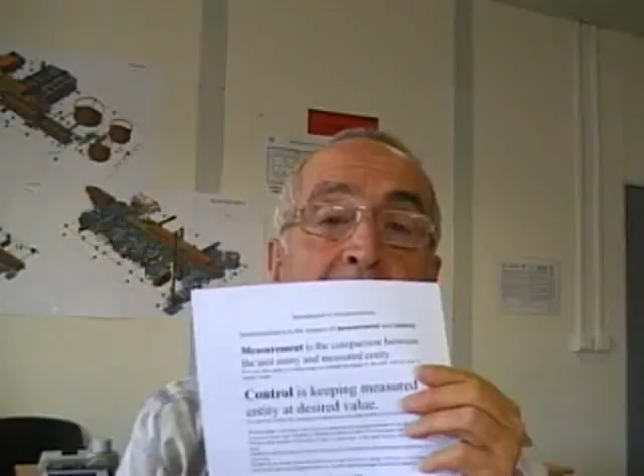Once again, measurement is the comparison between the unit entity and measured entity or quantity. And control is keeping measured entity or quantity at desired value or set point. In a plant, this means, for example, to keep the level of a tank at 60% of its maximum level.

Process plant is the plant where process materials, for example, mixture of oil and gas, are being treated to obtain semi-finished or finished products, crude to be transported through pipeline. Process plant operates following a recipe or technology in the same way as a recipe to prepare food. Further, to run the plant, civil works and electrical, mechanical and instrument equipments are necessary.

Further on, some forms of energy, electrical, energy from gas or oil, are necessary. And finally, the most important factor to run the plant are people involved in plant's operation. Instrumentation constitutes 10 to 20% of value of a plant. If we compare a plant with human body, instrumentation is the brain, the eyes, the nose, the ears, the hands and the legs. So it can be seen how instrumentation is a vital part of a plant.

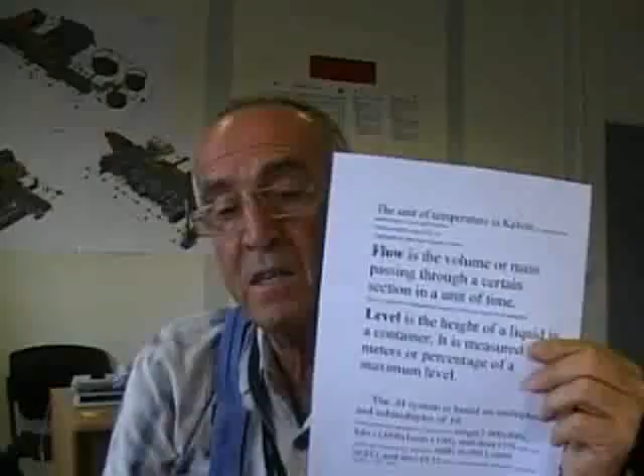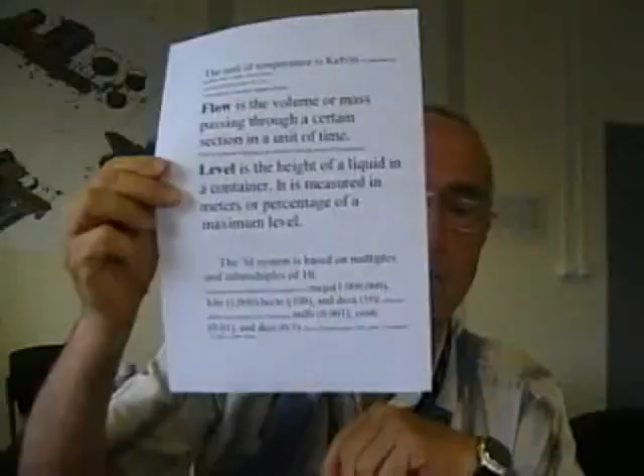Flow is the volume or mass passing through a certain section in a unit of time. Flow is expressed in kilograms per second or liters per second or its multipliers. Level is the height of a liquid in a container. It is measured in meters or percentage of a maximum level.

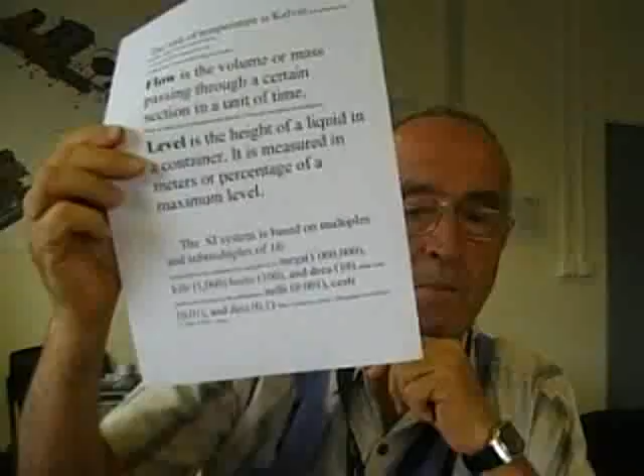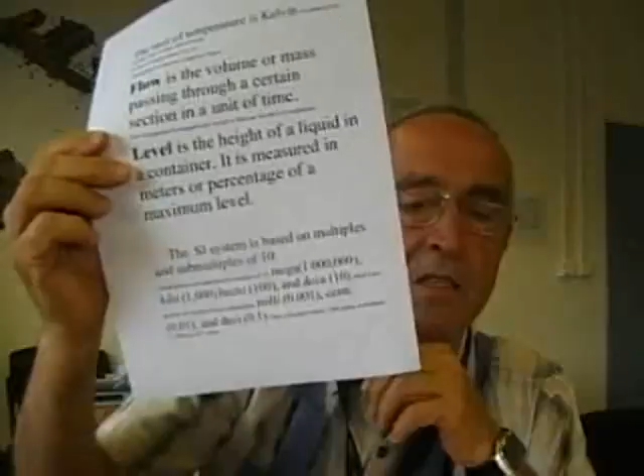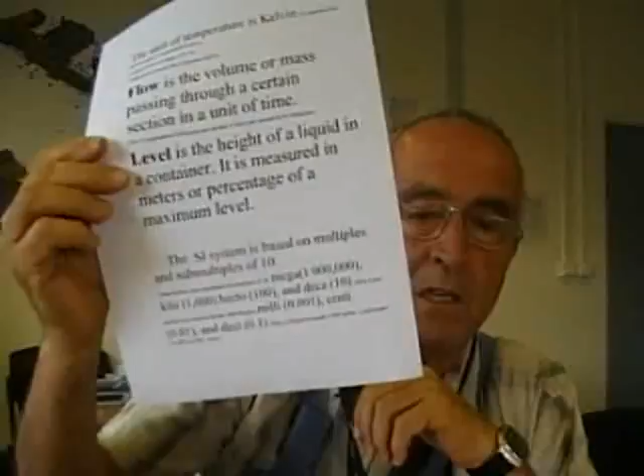The SI system is based on multiples and submultiples of 10. Greek prefixes are established for multiples of 10. Mega means 1,000,000, kilo means 1,000, hecto means 100, deca means 10, while Latin prefixes are selected for submultiples. Milli means 0.001, centi means 0.01, and deci means 0.1.

Measurement error. It is impossible to achieve total accuracy of measurement of any entity or quantity. A measurement error is always present. There are three definitions of errors and a definition of class related to measurement error. Absolute error is the difference between the measured value and true value. Relative error is absolute error divided by measured value. Percentage error is relative error multiplied by 100 and expressed in percentage.

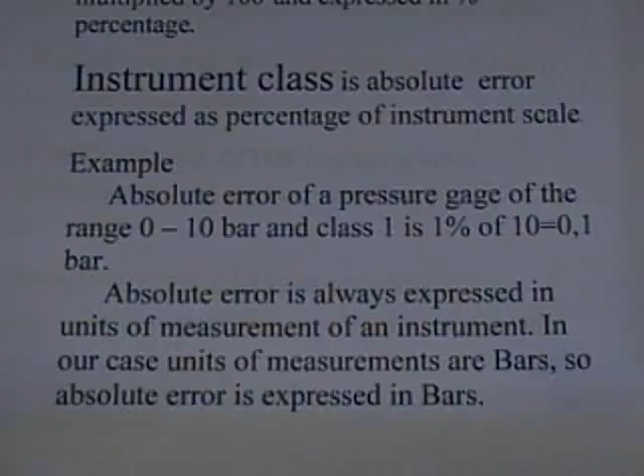Instrument class is absolute error expressed as percentage of instrument scale. Example: absolute error of a pressure gauge of the range 0 to 10 bar and class 1 is 1% of 10, which is 0.1 bar. Absolute error is always expressed in units of measurement of an instrument. In our case, units of measurement are bar, so absolute error is expressed in bar. Class 1 means that absolute error of the pressure gauge in the example is 0.1 bar.

If a pressure gauge has the scale of 0 to 16 bar and its class is again 1, its absolute error is 1% of 16, it means 0.16 bar. If its class is 2.5, its absolute error is 2.5% of 16. 2.5% of 16 is 0.025 multiplied by 16, which is 0.4. Class 2.5 of a pressure gauge with the scale of 16 bar means that the pressure gauge has an absolute

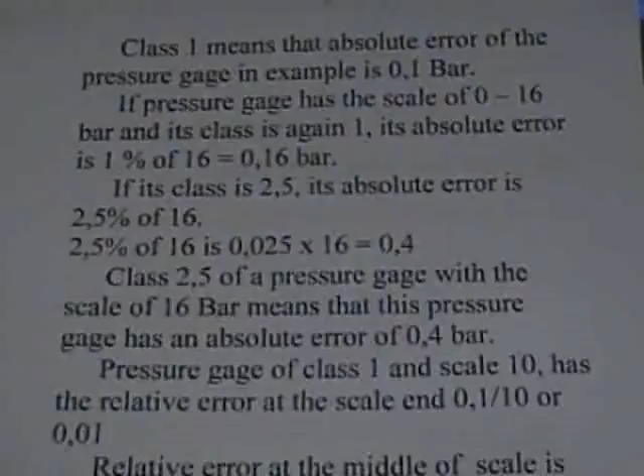error of 0.4 bar. A pressure gauge of class 1 and scale 10 has the relative error at the scale end of 0.1 divided by 10, or 0.01. Relative error at the middle of scale is 0.1 divided by 5 equals 0.02. 0.02 is twice as big as 0.01. At the middle of scale, relative error is double that at the top end of the scale. It is very important to understand that every instrument has the greatest accuracy at the top end of its scale.

Instrumentation basics. It has been said in the introduction paragraph that instrumentation is the science of measurement and control. And it has been explained what is measurement, what is control, and what is process plant. Let us go a little bit further, explaining in more detail what is control. Let us examine flow control.

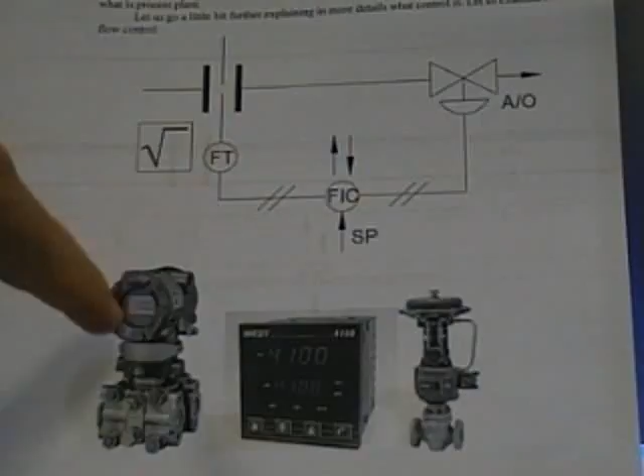On the picture we see 4 elements: orifice plate, flow transmitter, controller, and control valve. We see that flow can be controlled with 3 elements: flow element, orifice, and flow transmitter, flow controller, and control valve. Orifice causes pressure drop proportional to flow. Pressure drop is detected by pressure drop transmitter, which converts it to a standard communication signal and sends it to the controller.

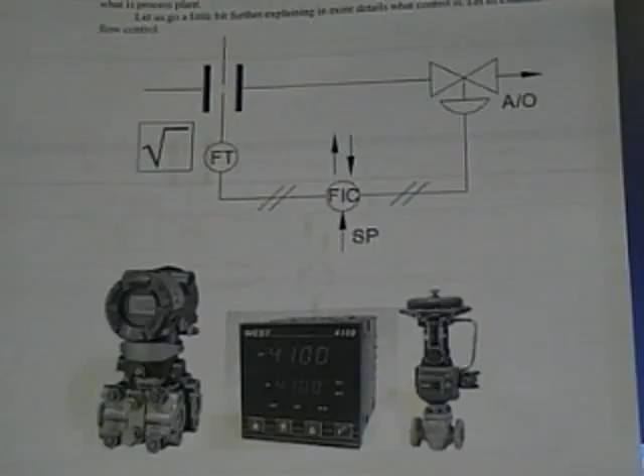Controller has 1 input, 1 output, and a set point. If the input measured value of flow is different from the set point desired value of flow, an output signal is created to change control valve opening in order to raise or decrease the flow to make it equal to the desired value or set point. These 3 elements, transmitter, controller, and control valve, constitute a control loop.

There is another element of instrumentation. It is called information. In fact, it is necessary to know the amount of flow, the so-called settings of controller, and the opening of control valve. Today, information is represented on a screen of a monitor. Now we can say that instrumentation is constituted of 4 items: transmitter of process quantity, controller of process quantity, control valve, and information entity.

Less than 100 years ago, processes have been controlled manually. Then, 70 years ago, appeared first controllers. 60 years ago, appeared the first control room and pneumatic instrumentation. Pneumatic instrumentation uses compressed air as the energy for its operation. Every transmitter had its indicator and every control loop had its single controller.

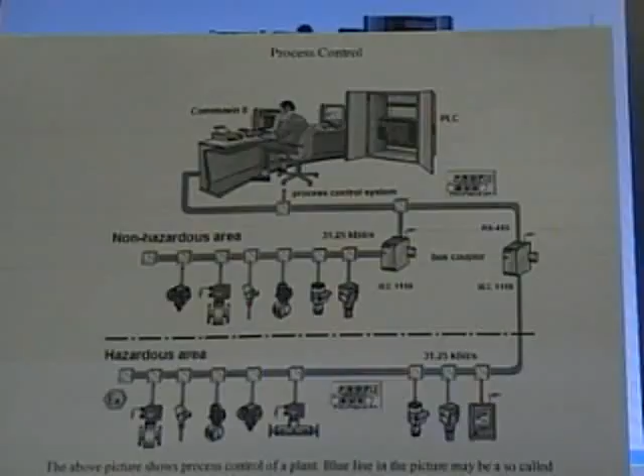The above picture shows process control of a plant. Blue line in the picture may be a so-called field bus, that is, many incoming and outgoing cables to and from DCS, distributed control system. DCS is a controller with its inputs and outputs from the field and monitors on which process data are shown.

Emergency shutdown system. A plant has a separate emergency shutdown system. It is nothing else but another DCS control system, whose function is to control the stopping of the plant in case of an emergency situation. It has similar elements as DCS system, that is, field instruments which are mostly fire, smoke, or flammable and toxic gas detectors, but also process instruments which, in case of plant abnormal operation, initiate plant shutdown, and as the output, control valves, which are now called shutdown valves, and switches to activate various shutdown equipment and sirens. ESD system has no proper monitors, but uses generally DCS monitors to show ESD information.

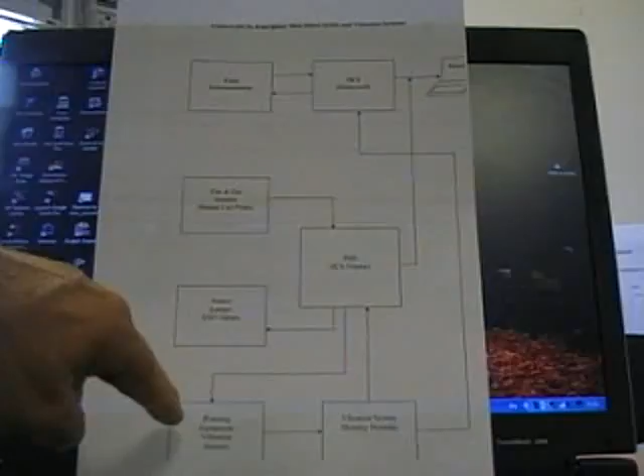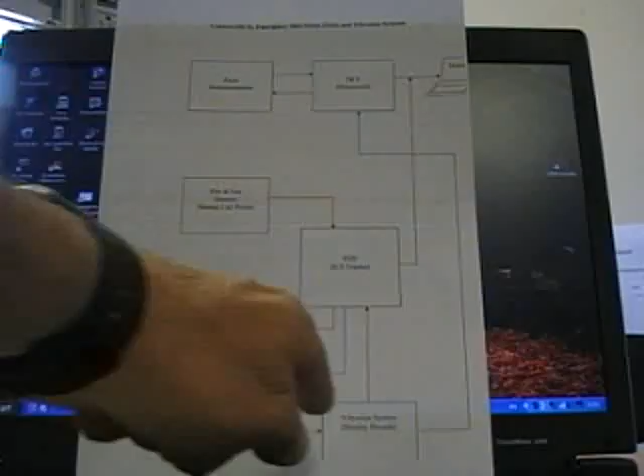On this picture, we see the schematic representation of all three systems. Field instrumentation is connected to DCS. All data are represented on monitors. Fire and gas sensors and manual call points are the inputs to emergency shutdown system. Also, rotating equipment vibration sensors are connected as the input to ESD system. Output of ESD system are sirens, lamps, and ESD valves. Input to the ESD system comes from vibration system.

Documentation, process diagrams. Many documents are issued during the development of a plant project. The main ones are block diagrams, process flow diagrams, and the most important, piping and instrument diagrams, PID, location plan, data sheets, loop diagrams, manuals. A block flow diagram is a schematic illustration of the major process elements. The blocks or rectangles represent a unit operation. The blocks are connected by straight lines, which represent the process flow streams, which flow between the units.

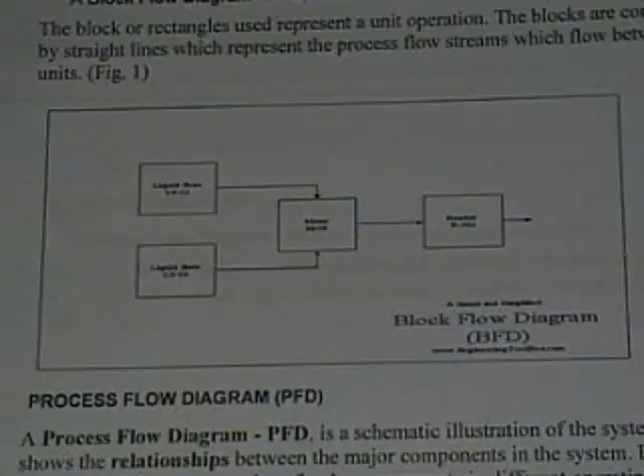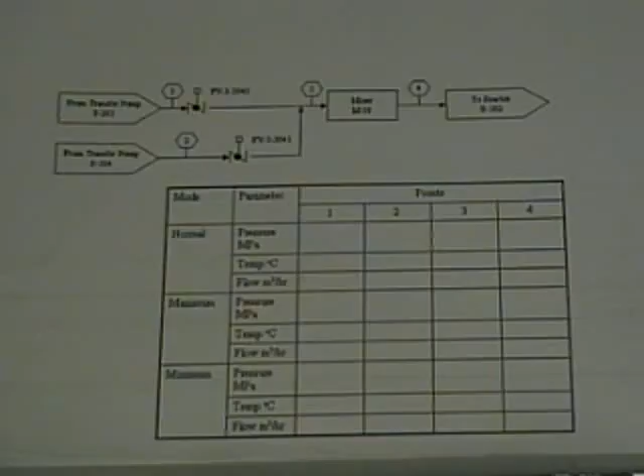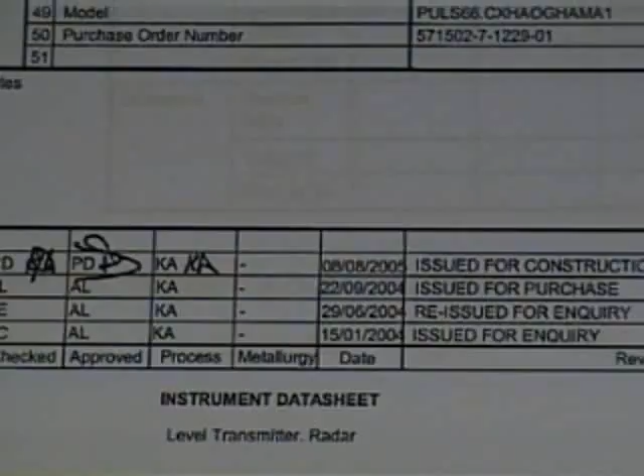A process flow diagram is a schematic illustration of the system. It shows the relationships between the major components in the system. It also tabulates process design values for the components in different operating modes, typical minimum, normal, and maximum. A piping and instrumentation diagram, PID, is a schematic illustration of functional relationship of piping, instrumentation, and system equipment components. Location diagram shows the position of various, for instance, instruments in the plant. Datasheet is the identification document of an instrument with its process, mechanical, and electrical characteristics.

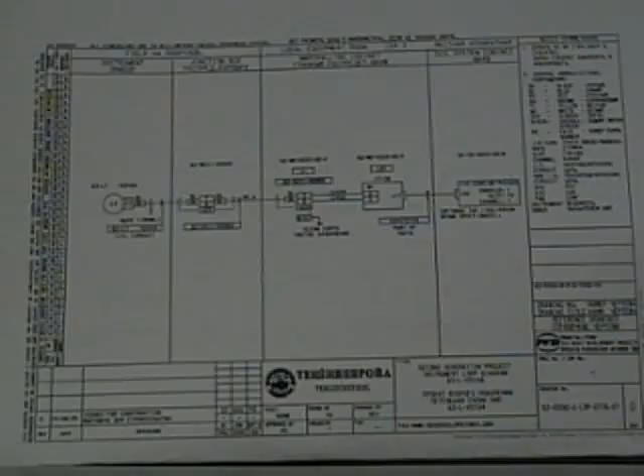Loop diagrams show all the connections of an instrument. It is divided in two sectors, field and control room. Field is divided in subsectors, instrument, junction box. Loop diagram is essential for the whole instrument connection for the installation and maintenance.

Manuals contain every information concerning the plant and instruments operation.

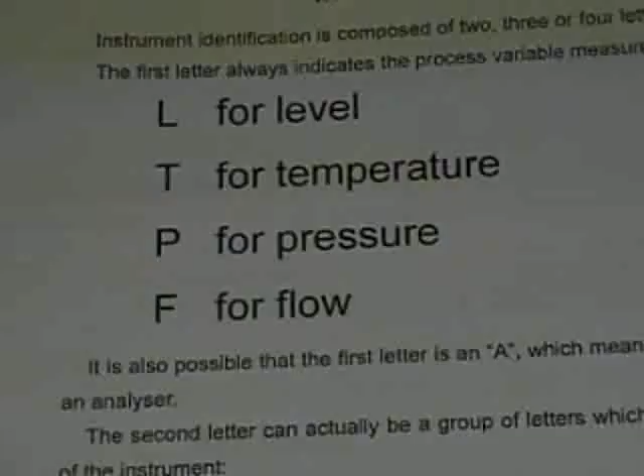Instrument identification. Instrument identification is composed of 2, 3, or 4 letters, of which the first letter always indicates the process variable measured by the instrument. L for level, T for temperature, P for pressure, F for flow. It is also possible that the first letter is an A, which means that the instrument is an analyzer.

The second letter can actually be a group of letters which represent the function of the instrument. T for transmitter, I for indicator, C for controller, R for recorder. For example, PT is a pressure transmitter. PI is a pressure indicator. PIC is a pressure indicator and controller. PRC is a pressure recorder and controller.

There are 4 graphical elements of a P&ID: discrete instruments, DCS, distributed control system, PLC, programmable logic controller, and ESD, emergency shutdown functions. Discrete instruments are indicated by a circle. DCS functions are circles surrounded by a square. PLC, programmable logic controller, functions are indicated as follows. ESD, emergency shutdown functions, are also indicated as follows.

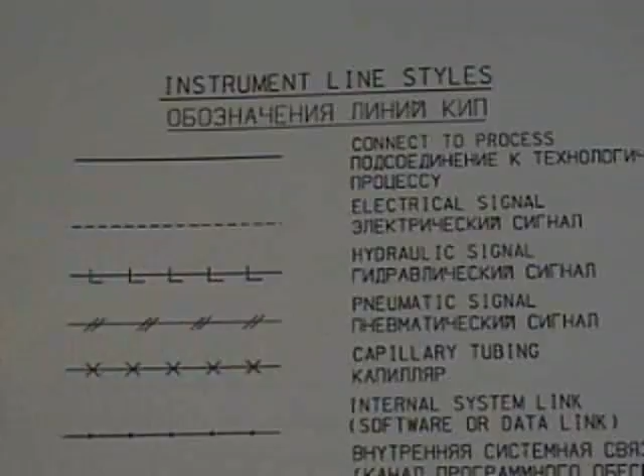Instrument lines designation. Full line, instrument directly connected to the process. Dotted line, electrical signal. Hydraulic signal, pneumatic signal, capillary tubing, internal system link.

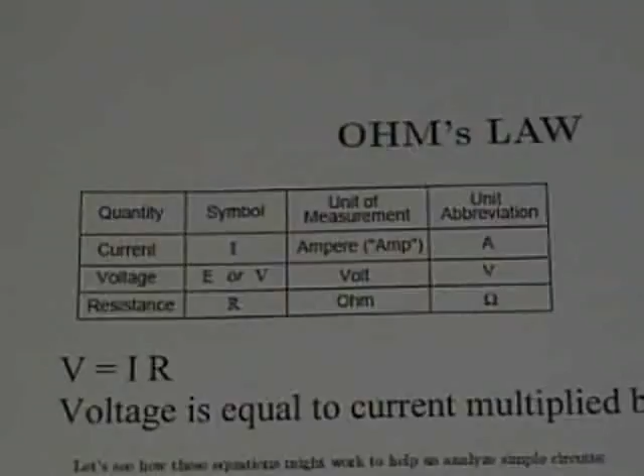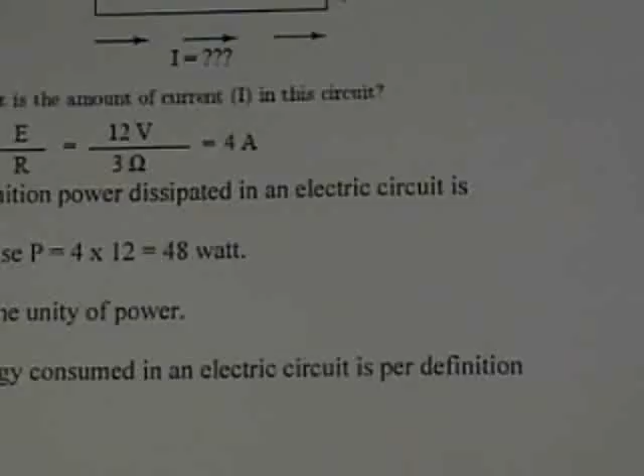Ohm's law. Voltage is equal to current multiplied by resistance. Per definition, power dissipated in an electric circuit is P equals V times I. It means power is equal to tension multiplied by current. Watt is the unit of power. The energy consumed in an electric circuit is, per definition, power multiplied by time. Energy equals power by time. The unit of energy is watt-second.

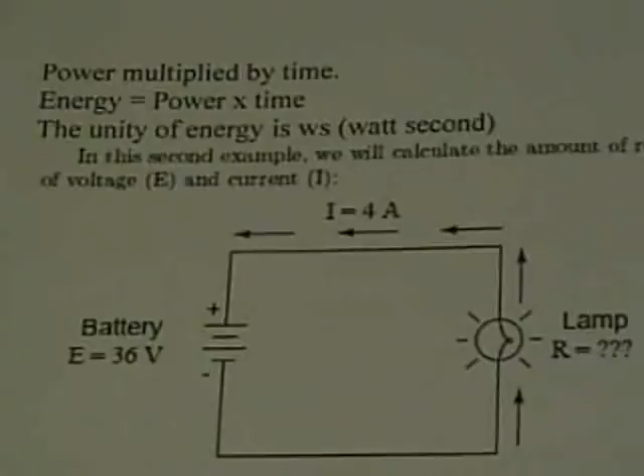If the current flows always in one direction, it is called direct current or DC. Direct current is for now used for instrument communication. There is a standard current communication of 4 to 20 milliamperes at 24 volts power supply at 0 to 600 ohms circuit resistance. The communication with DC current is also called analog communication. If the current changes its direction, it is called alternating current or AC.

There is another type of communication constituted of direct current pulses. This communication is called digital communication. All world communication is now digital. Only in instrumentation there is some analog communication. At SGP, all field transmitters use digital communication called HART.

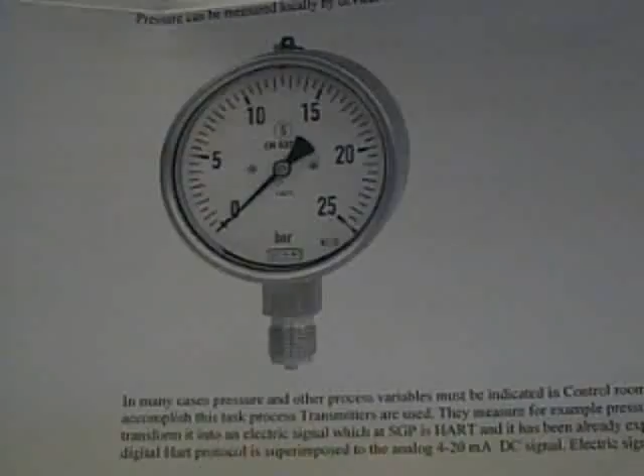In many cases, pressure and other process variables must be indicated in the control room. To accomplish this task, process transmitters are used. They measure, for example, pressure and transform it into an electric signal, which at SGP is HART, and it has been already explained that the digital HART protocol is superimposed on the analog 4 to 20 milliamperes DC signal. The electric signal goes to an indicator, or in most cases to a DCS monitor.

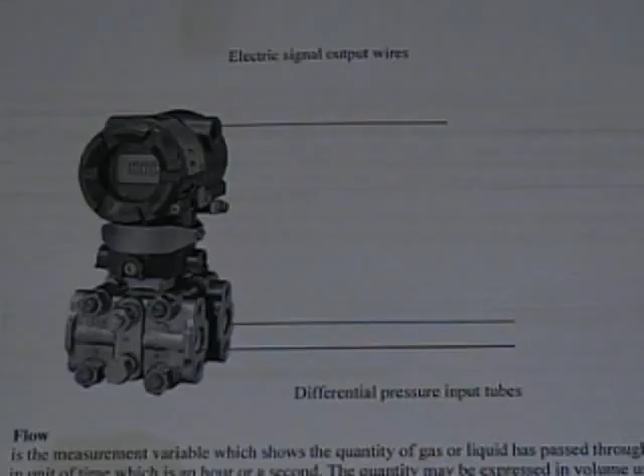We see the picture of a differential pressure transmitter used at SGP. The lower part is connected, usually by stainless steel pipes, to the pipe. The upper part produces an electrical signal proportional to the applied differential pressure.

Flow is the measurement variable which shows the quantity of gas or liquid passed through a pipe in a unit of time, which is an hour or a second. The quantity may be expressed in volume units, cubic meters per hour or cubic meters per second, or mass units, kilograms per hour or kilograms per second.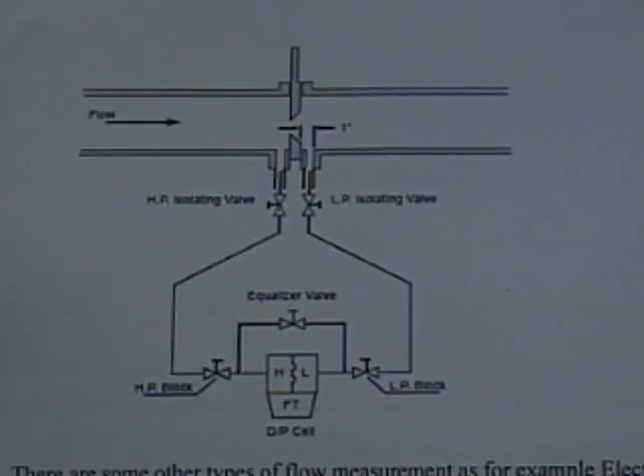The most common flow measurement is by inserting in a pipe a restriction in the form of an orifice between two flanges and measuring the pressure drop caused by it. Pressure drop is proportional to the square of the flow. The above differential pressure transmitter is connected to high and low pressure sensing lines. There are some other types of flow measurement devices, as for example electromagnetic and variable area flow meters, but they will not be discussed in this session.

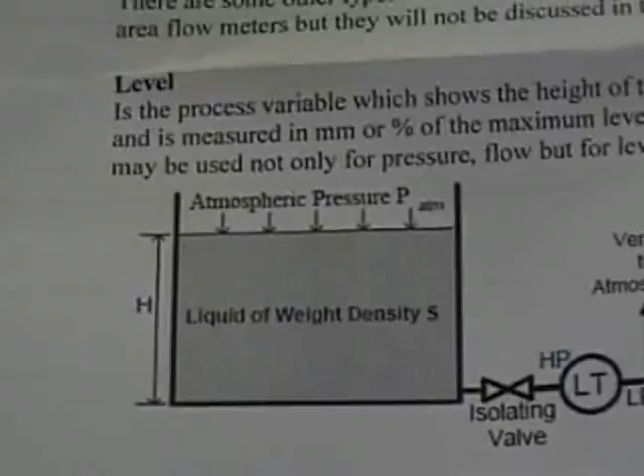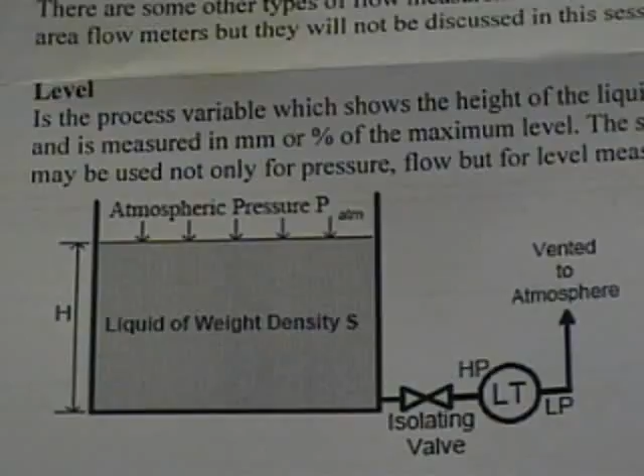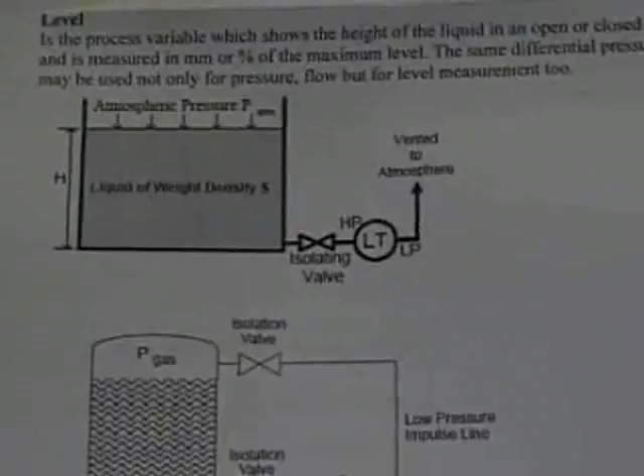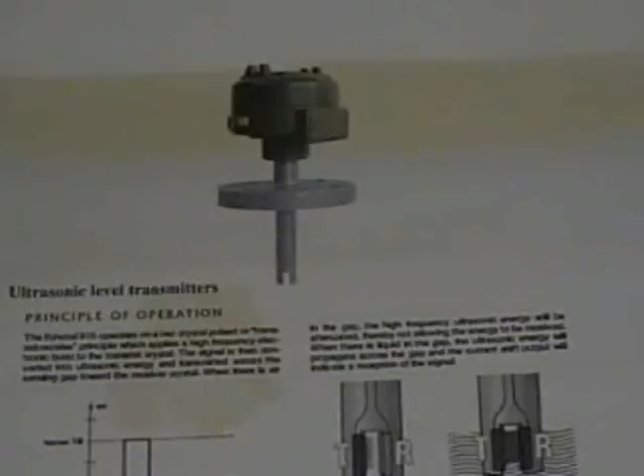Temperature. Temperature of an object is its level of hotness or coldness. Temperature is one of the 7 base measurement units. The temperature unit of measurement is Kelvin. For practical use, Celsius is used. The relationship between the Kelvin and Celsius temperature scales is: Celsius is equal to Kelvin minus 273. Two sensors are used for temperature measurement: thermocouples and resistance thermometers.

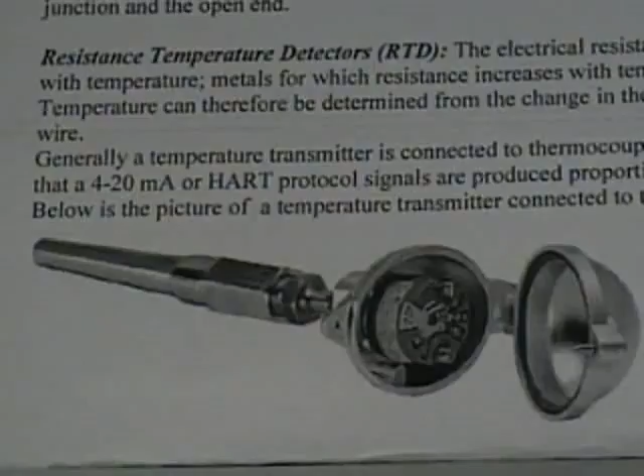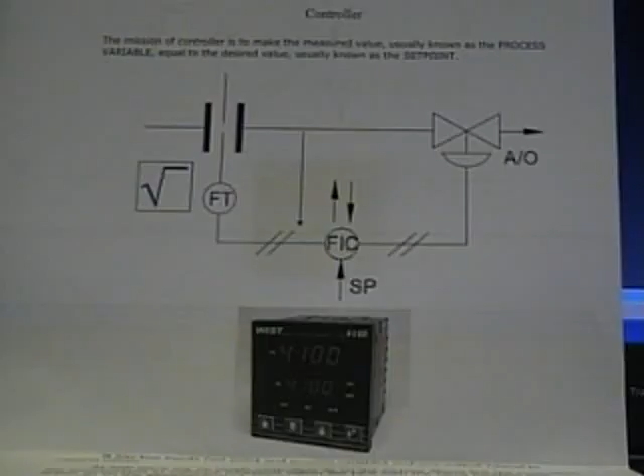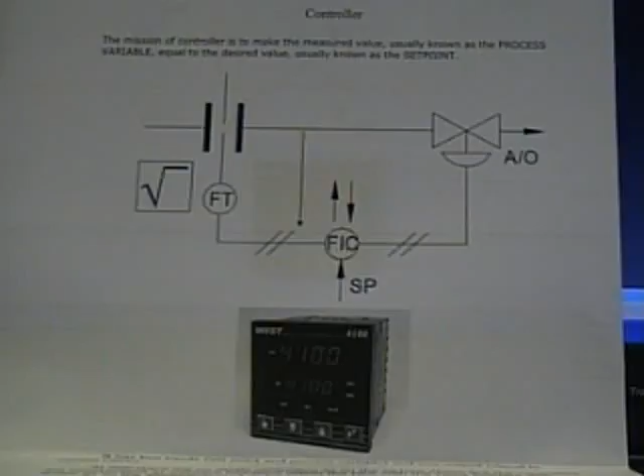Controller. The mission of the controller is to make the measured value, usually known as the process variable, equal to the desired value, usually known as the set point. The controller has two inputs, set point and process variable, and one output, the signal to the control valve. At SGP there are no single controllers as in the picture, but the controllers are incorporated as software functions within the DCS system with the same function and action as in this picture. The process operator sees on the DCS monitor a similar picture as on the controller, and that is the set point and process variable.

Control valves. Control valves, or final control elements, are the third element of the control loop. The purpose of the control valve is to reduce the section of the pipe where the control valve is installed in order to control the flow of a fluid through the pipe. In such a way, not only flow, but pressure, level and temperature may be controlled. Control valves may be continuous and on-off. Continuous control valves may assume any position, that is, they can reduce the section of the pipe from the total closed to the total open position. On-off control valves may assume only two positions, open and closed.

Depending on the energy used to move control valves, there are pneumatic, electric and hydraulic control valves. On-off control valves are usually pneumatic. Controllers produce an electric signal which is converted into pneumatic by current to pressure transducers in order to move the control valve.

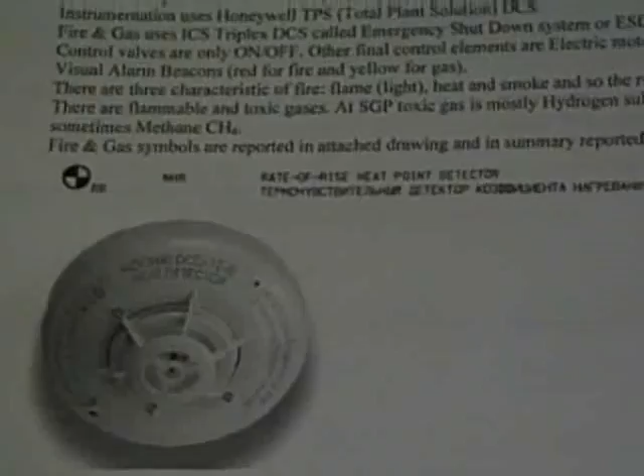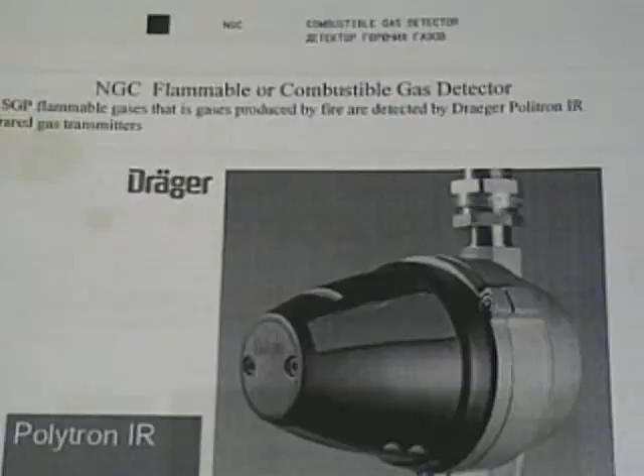NHR, rate of rise heat point detector. NSO, optical smoke detector. NFD, combined infrared and ultraviolet flame detector. NGC, combustible gas detector. At SGP, flammable gases, that is gases produced by fire, are detected by Draeger Polytron IR infrared gas transmitters. These detectors are installed either standalone or in aspirator cabinets.

In the latter case, flammable gases from stacks or other ducts are aspired and brought to the detector through small tubes. The output of flammable gas transmitter is 4 to 20 milliamperes and HART, and can thus be checked by HART communicator. The 4 to 20 milliampere output is configured at Honeywell DCS system as 0 to 100% of low explosion limit. It will be explained later what low explosion limit means.

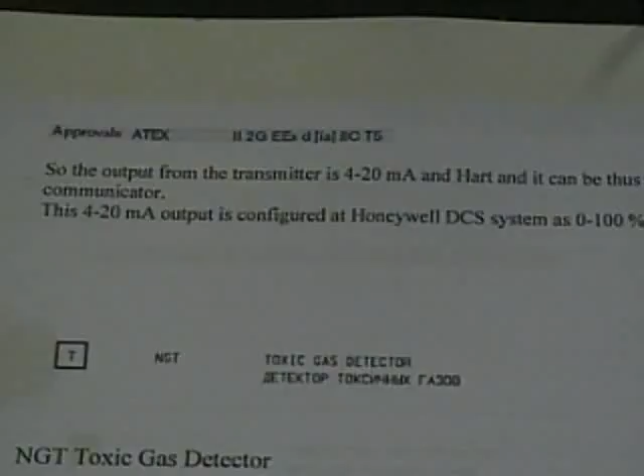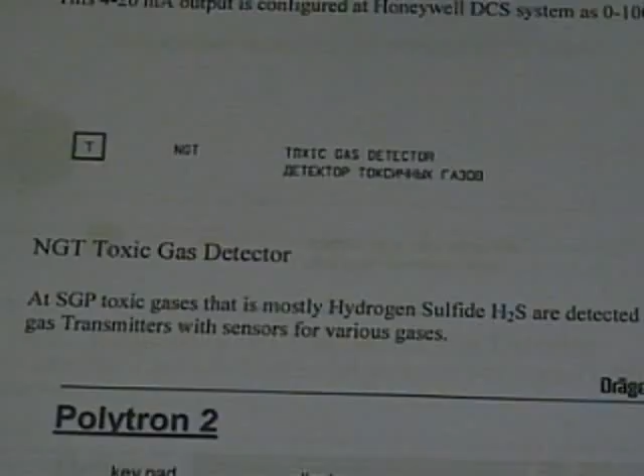NGT, toxic gas detector. At SGP, toxic gases, that is mostly hydrogen sulfide, are detected by Draeger Polytron 2 toxic gas detectors and transmitters. NGH, hydrogen gas detector. Hydrogen is detected by Draeger Polytron 2 toxic gas transmitters, the same as for H2S, but with H2 sensors.

NGO, oxygen deficiency detector. Oxygen deficiency is detected by Draeger Polytron toxic gas transmitters, the same as for H2S, but with O2 sensors. Polytron 2 is one universal transmitter for all toxic gases and O2. NMC, manual call point. NSL, visual alarm beacon.

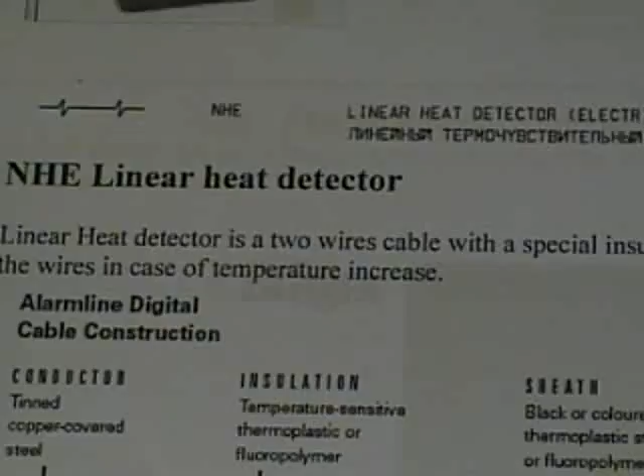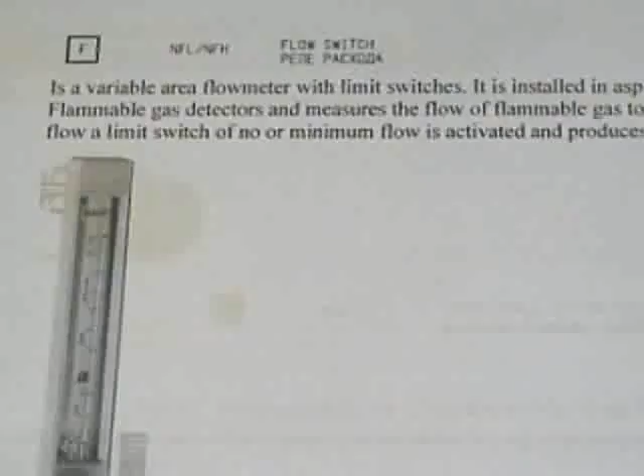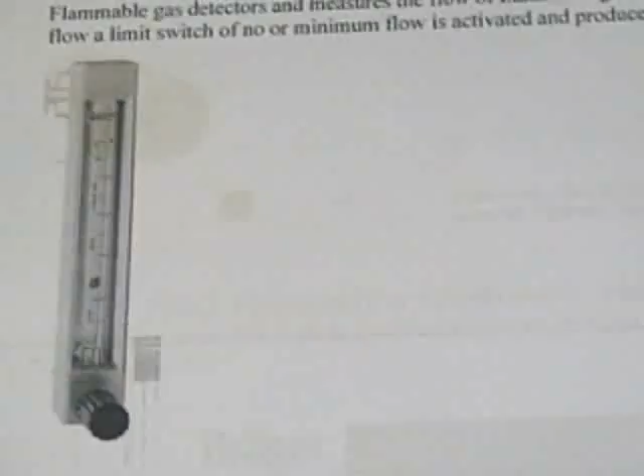NHE, linear heat detector. Linear heat detector consists of a two-wire cable with a special insulation between wires which shorts the wires in case of temperature increase. NFL flow switch is a variable area flow meter with limit switches. It is installed in aspirator cabinets containing flammable gas detectors and measures the flow of flammable gas to the detectors. If there is no flow, a limit switch of no or minimum flow is activated and produces an alarm signal.

Explosions and the protection of electrical and instrument equipment in explosive atmospheres. It is a fact that gases, vapors, and mists escape during the production, processing, transportation, and storage of flammable materials in the chemical and petrochemical industries, as well as in the production of mineral oil and natural gas, in mining and many other sectors. During many processes also, flammable dusts are created.

These flammable gases, vapors, mists, and dusts form an explosive atmosphere with the oxygen of the air. In the case that this atmosphere is ignited, explosions take place which can result in severe harm to human life and property. An explosion is the sudden chemical reaction of a flammable material with oxygen with simultaneous release of high energy in form of fire and pressure. Flammable materials may be present in the form of gases, vapors, mists, or dusts.

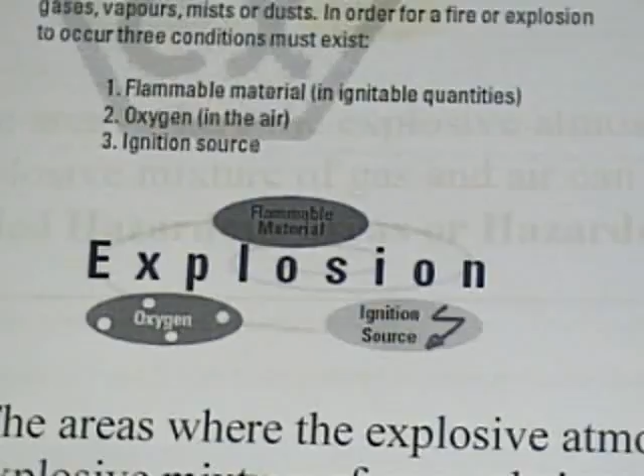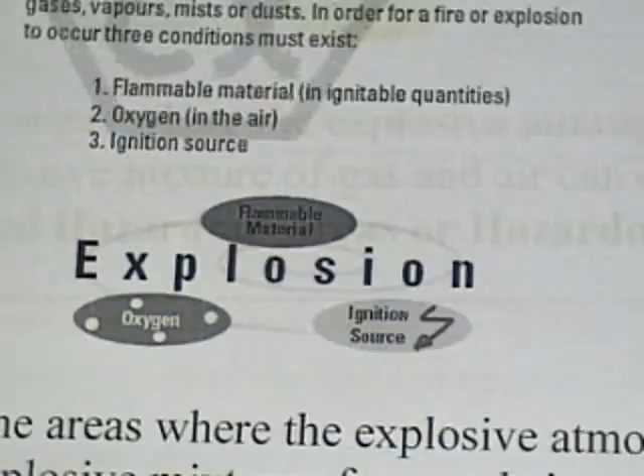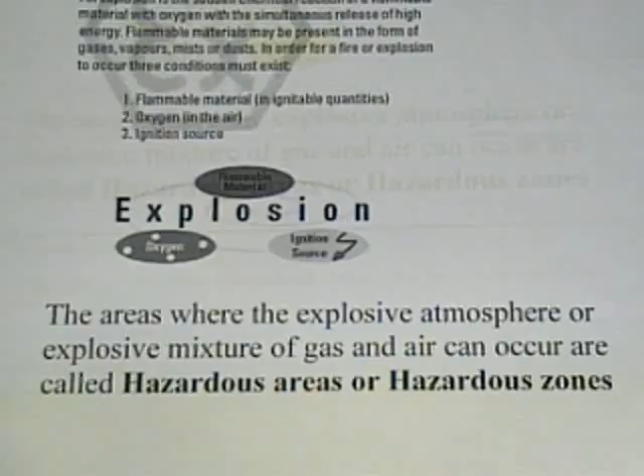In order for a fire or explosion to occur, three conditions must exist: flammable material in ignitable quantities, oxygen in the air, ignition source. It is called explosion triangle. The areas where the explosive atmosphere or explosive mixture of gas and air can occur are called hazardous areas or hazardous zones. Hazardous zones are divided into zones 0, 1, and 2.

These zones relate to the predicted occurrence of an explosive atmosphere in that zone. Zone 0, explosive atmosphere is present more than 1,000 hours a year. A year has 8,000 hours. Zone 1, explosive atmosphere present between 10 and 1,000 hours a year. Zone 2, explosive atmosphere present less than 10 hours a year. There are three gas groups in relation to their ignition energy: 2A, 2B, 2C.

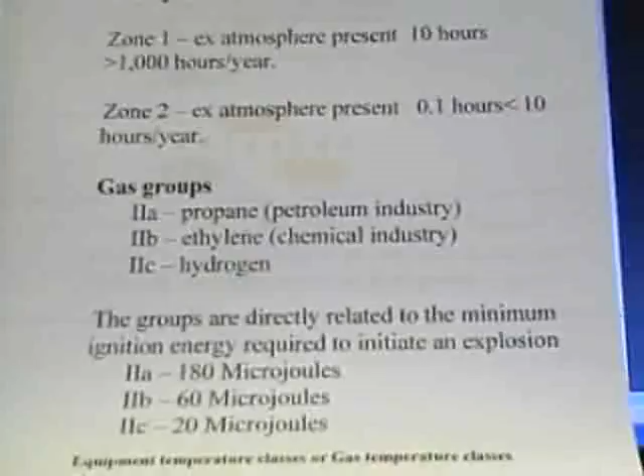The groups are related to the minimum ignition energy required to initiate an explosion. For the group 2A, the minimum ignition energy is 180 microjoules. For the group 2B, it's 60 microjoules. And for 2C, it's only 20 microjoules.

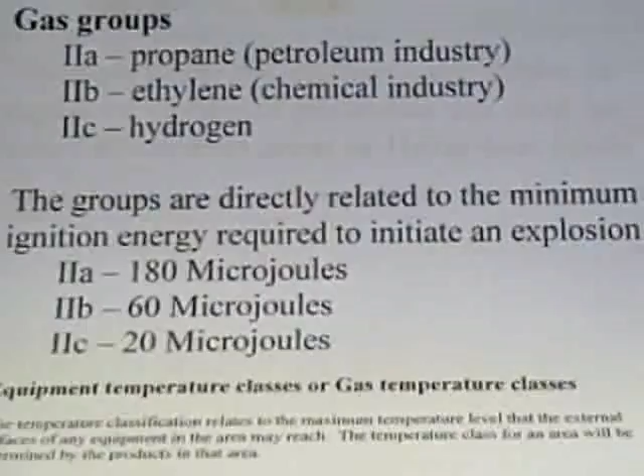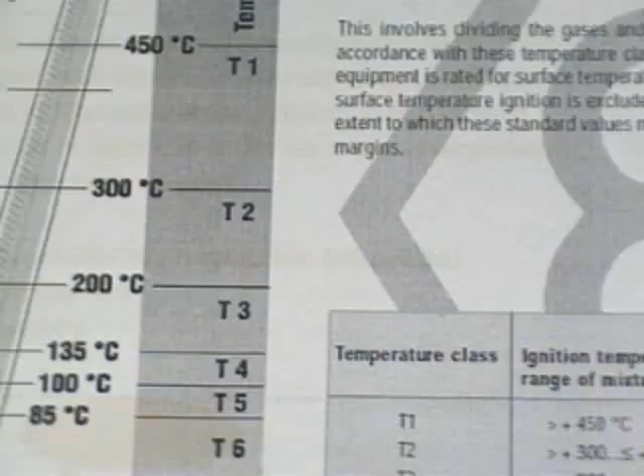Depending on the ignition temperature of the gases, there are 6 temperature classes: T1 with 450 degrees ignition temperature and T6 with 85 degrees ignition temperature. Electrical equipment used in explosive atmospheres must have the surface temperature lower than the temperature class of the gas present in the explosive atmosphere. The best equipment is the one with surface temperature lower than 85 degrees Celsius, and it has the class T6.

Let us examine protection types of electrical equipment. First, flame-proof enclosure. It is marked by the letter D. It is the type of protection in which components that could ignite a potentially explosive atmosphere are fitted in an enclosure that will contain the pressure of an explosion, preventing ignition of inflammable gas outside the enclosure.

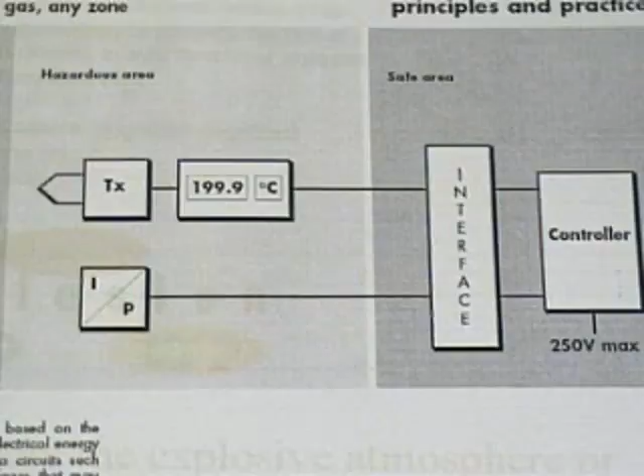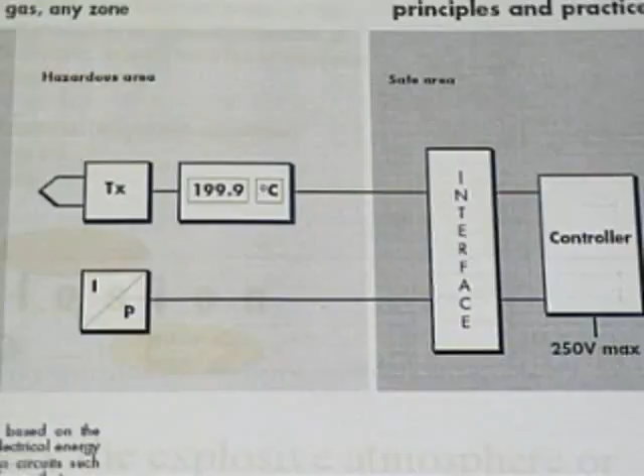Then we have intrinsically safe type of protection, marked I. Intrinsic safety, IS, is based on the principle of restricting the electrical energy available in hazardous area circuits, such that any sparks or hot surfaces that may occur as a result of electrical faults are too weak to cause ignition. Isolators in safe area prevent the flow of energy into hazardous area.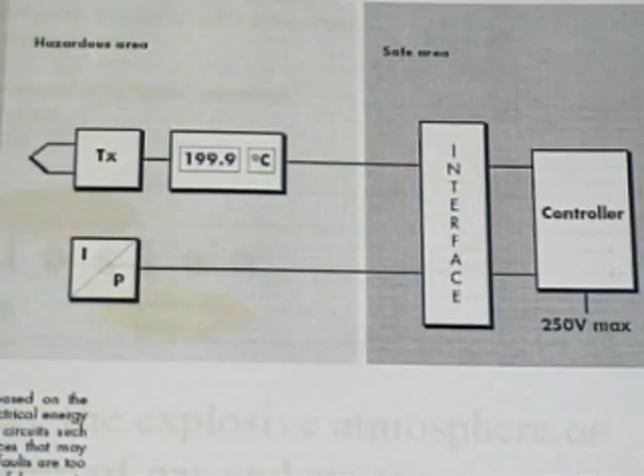Intrinsic safety is the only protection that can be used in zone 0. Intrinsically safe equipment for zone 0 has an additional letter A, so the designation is IA. Intrinsically safe equipment for zone 1 is designated IB.

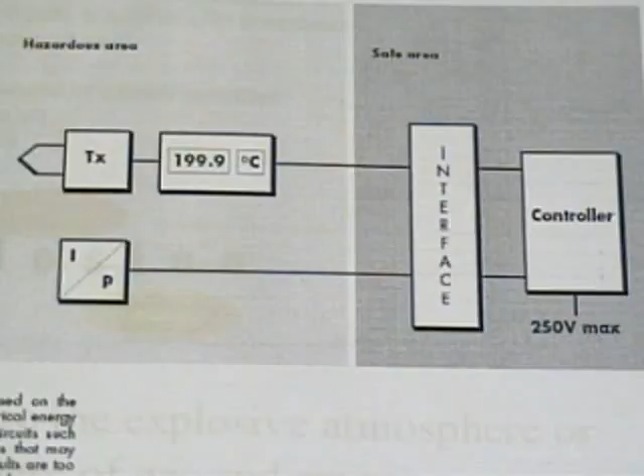The third type of protection, called increased safety and marked E, consists of higher quality equipment, and it refers practically to the junction boxes. No electrical live equipment in increased safety junction boxes is allowed, just terminals.

ATEX directive. The directive covers equipment and protective systems which may be used in areas endangered by potentially explosive atmospheres created by the presence of flammable gases. The directive covers both electrical and mechanical equipment. Compliance with ATEX directive has been a legal requirement in all European Union member states since July 2003.

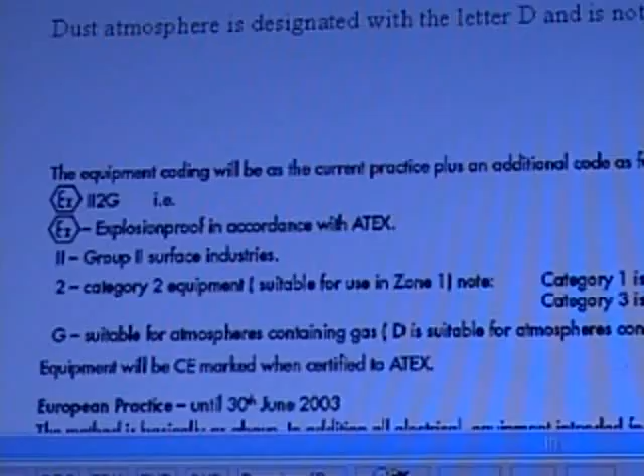Ex, explosion proof in accordance with ATEX. II, Group 2 for surface industries. 2, Category equipment suitable for Zone 1. G, suitable for atmospheres containing gas. This coding is added to the former coding, for example, EEx d IIB T4,

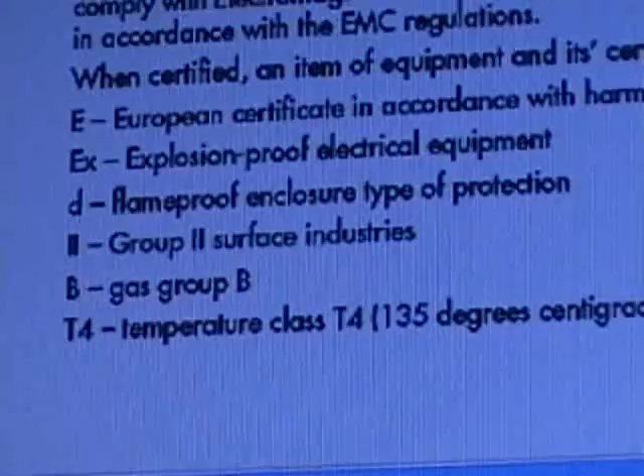where E is European certificate in accordance with standards. Ex, explosion-proof electrical equipment. D, flame-proof electrical equipment. 2, group of gases. B, group 2B of gases. And T4, temperature class, 135 degrees centigrade maximum surface temperature.

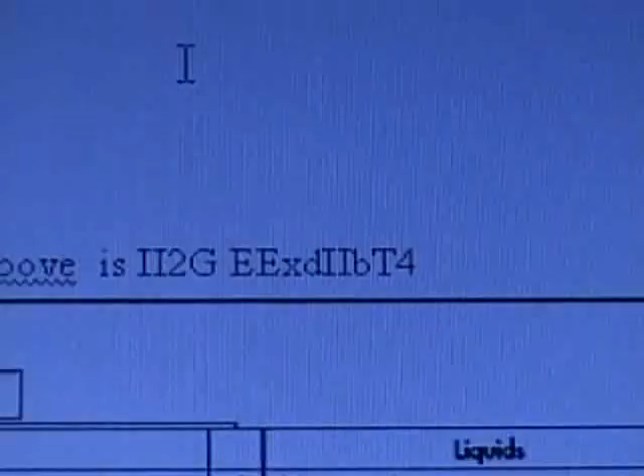So, the example of an ATEX equipment designation above is II 2G, EEx d IIB T4. Once again, Roman 2 means surface industries, 2G means Zone 1, E, European Union, Ex, explosion protected equipment, D, flame-proof electrical equipment, 2B, group of gases, T4, temperature.

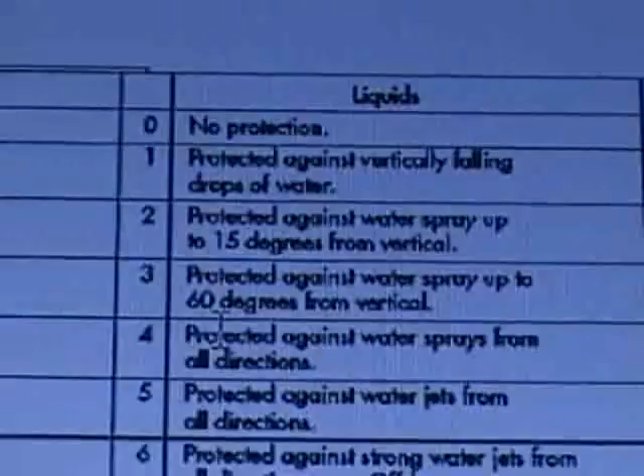Ingress protection, or IP. 2 digits are used to denote the level of ingress protection that a piece of apparatus enjoys. First number refers to solids and the second to liquids. 00 means no protection. As the number is higher, the protection is higher. For instance, the first number 6 means totally protected against dust.

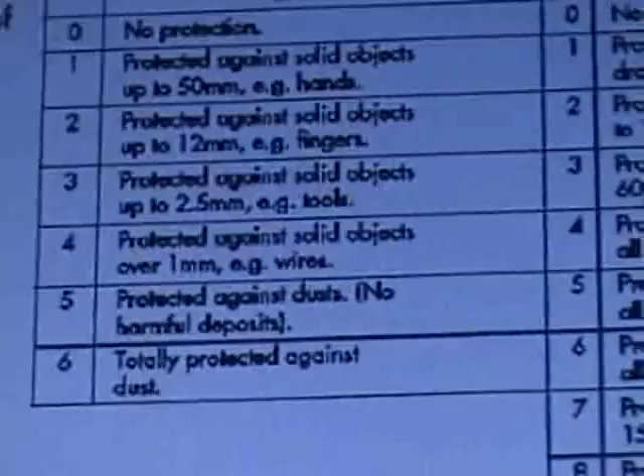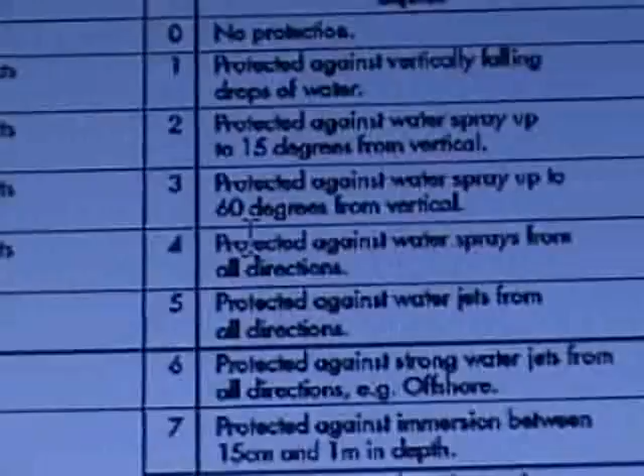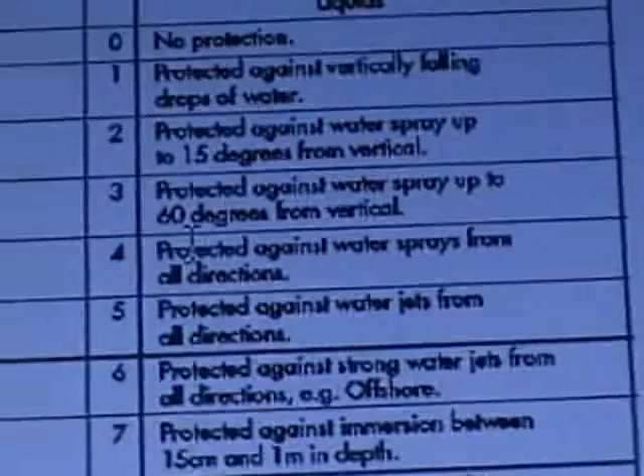Liquid protection has numbers from 0 to 8. 6, for instance, means protected against strong water jets from all directions. 8 means protected against long immersions under pressure.

Parts per million. Parts per million, or shortly ppm, means the number of particles within a million of particles. One apple within a million apples is 1 part per million. It is usually written 1 ppm. 3 apples within a million is 3 ppm. ppm is used at SGP to denote very small concentrations of H2S within air. For loop checking, ppm is used to denote the range of toxic gas detector, NGT.

Percent. Percent means divided by 100. For example, 75% is 75 divided by 100 is 0.75. 325% is 325 divided by 100 is 3.25. X percent of a number means x times the number divided by 100. Example, 12% of 345 is 12 multiplied by 345 divided by 100 equals 41.4.

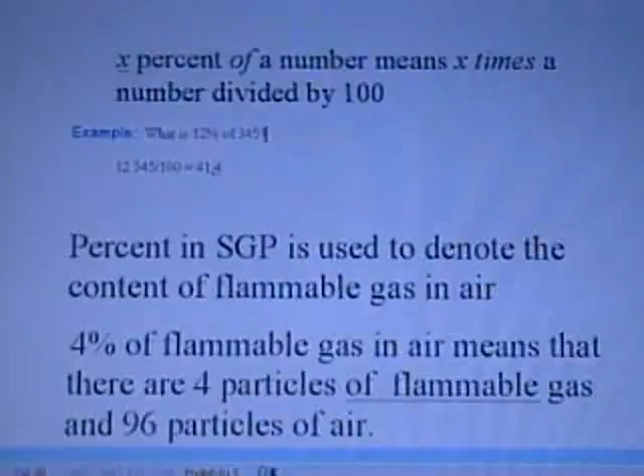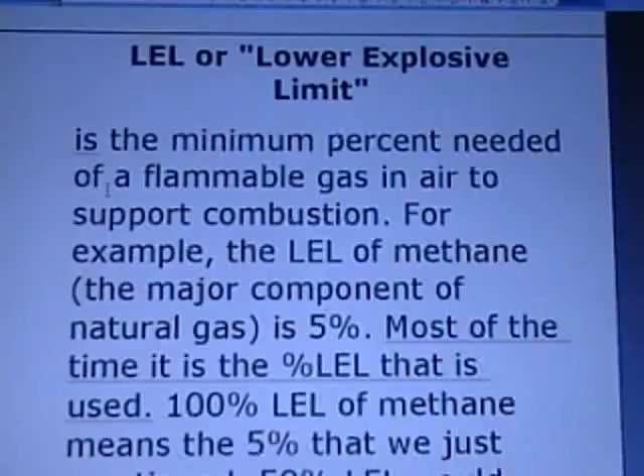Percent in SGP is used to denote the content of flammable gas in air. 4% of flammable gas in air means that there are 4 particles of flammable gas and 96 particles of air. LEL, or lower explosive limit, is the minimum percent needed of a flammable gas in air to support combustion. For example, the LEL of methane, the major component of natural gas, is 5%.